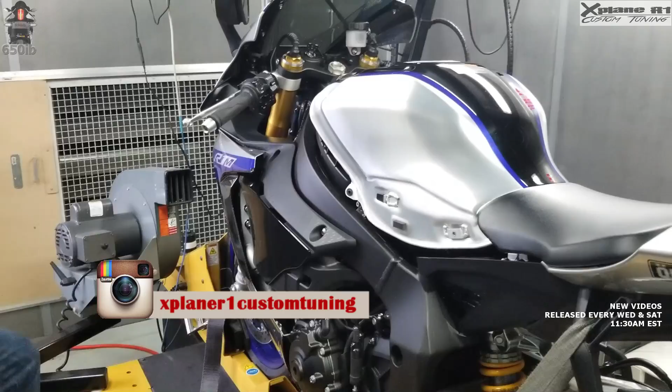Josh is going to be doing some filming for Nick as we go through the process of getting this ECU flash done and the bike made more steady, more reliable, and of course faster. So Nick, these bikes are known for having twitchy throttles and certain other issues from the factory. And as far as I know, you're the man at correcting all that.

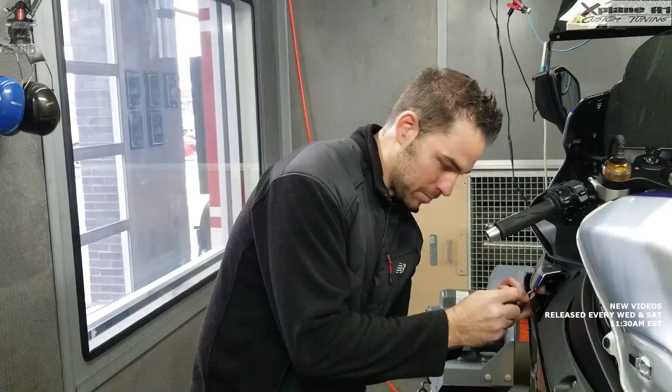Yes. Throttle mapping on these bikes is horrible - it's obviously chip control through the ECU. So I completely redo all the throttle mapping, smooth out ignition timing tables at part throttle so all the transitions are smooth. And then obviously tune the bike for power, correct air fuel ratio, smooth engine braking for you track riders. And then we go from there, see how the bike makes some power.

Sweet, man, super sweet. So your service, people can mail in their ECUs to you, you flash them and mail them back to them basically? Yes. You can go on my website, xplaner1customtuning.com, fill out a form, mail the ECU to me. I typically flash them and get them back to you the day after I get them, so it's fairly quick. You can also come to St. Louis, I dyno tune at QuickTime Motorsports. Shout out to Rudy for always letting me use his dyno whenever I need it. So yeah, you can come out and see me or mail the ECU and I can take care of it either way.

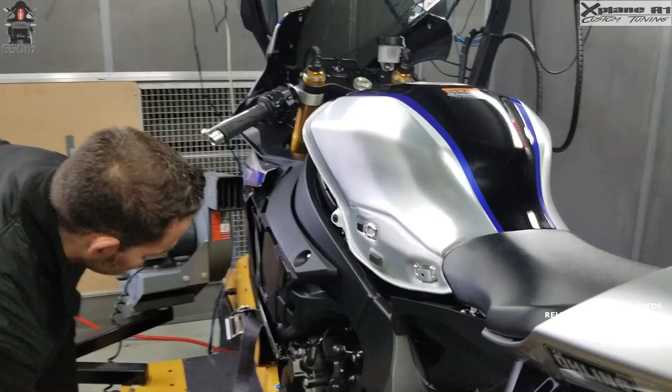Awesome, man, super sweet. Well, I'm pretty excited to see what we're going to be doing here today. We'll give Nick an opportunity to get to that ECU so he can pull it off the bike and get it flashed. We're going to start this off by doing a baseline run on the 2018 R1M just to see what type of power it makes before Nick does his excellent work to it. Then after that, Nick will flash the ECU.

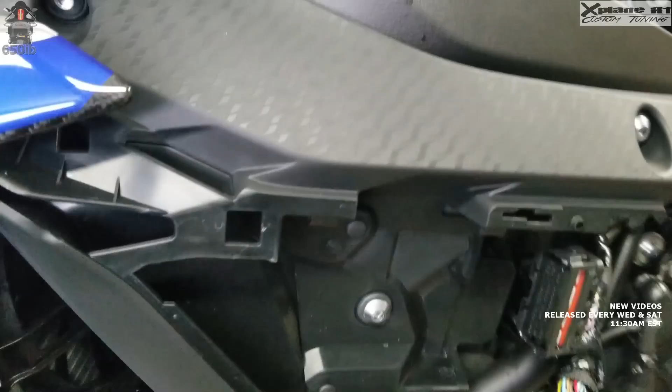So step one, Nick has successfully removed the ECU from the motorcycle, and he has it on his computer system doing his thing with it right now. All going well so far, Nick? Yes, it is going great. Got to disable the front wheel speed sensor so traction control doesn't go out of whack.

If you don't do that, you're gonna end up pulling the bike off the dyno, go for a short ride, clear the code, then come back on the dyno and reflash it again. So instead of doing that, we'll just do it the right way the first time. Makes sense. And it's a little chilly out there to be riding today. It's in the 40s here in St. Louis, for sure.

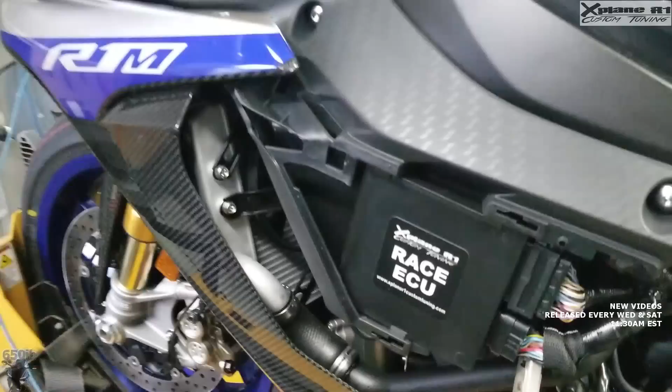All right, Nick. So Nick has flashed the ECU - well, I don't know what the hell he did. The ECU was out of the bike, now it's back in the bike. So Nick will tell us what he did. It's still a 100% bone stock ECU.

The only thing I changed was I cleared the diagnostic code for the front wheel speed sensor. So again, if you don't do that, you try to do a dyno pull, rear wheel spinning faster than the front wheel because obviously the front wheel's not moving, it's gonna throw traction control all out of whack. You got to pull the bike off, take it for a ride to clear everything up. So this is just a quick and easy way to not have that issue.

Now that we have that done, you're gonna jump on the bike and give us a stock dyno pull? Yes, here in a few minutes I'm gonna check to make sure the RPM pickup is reading correctly and everything else is good. And then I'll make some pulls.

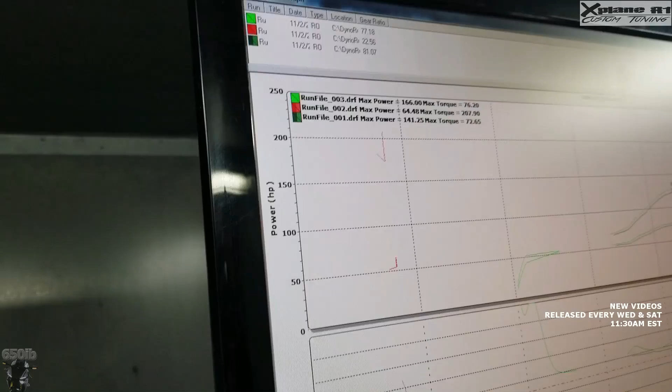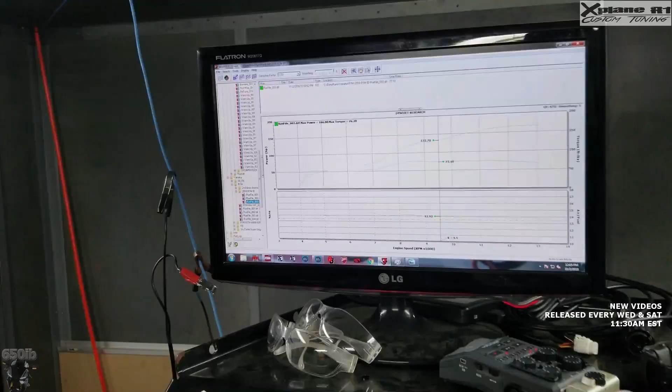So that was the first run, and it made about 166 horsepower, huh Nick? Yep, 166 horsepower and 76 foot-pounds of torque. It's 100% bone stock, with basically just sensors turned off that I need in order to get the bike on a dyno. Okay, so now we'll get this RPM pickup adjusted, hopefully, so it doesn't jump around like that. But the numbers are going to be correct, that won't change. Now we'll do a quick base flash, do some more pulls, and see what happens. I'm excited. 166, not bad for a stock bike.

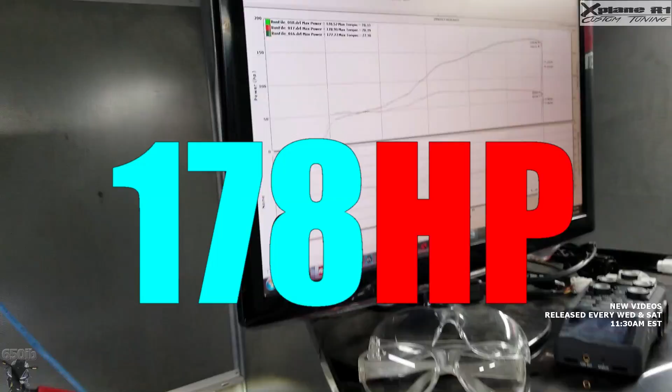Now Zach's going to be very happy when he finds out the throttle issue has been corrected, and this bike now has a smooth and linear throttle. It is very linear now.

I won't show the internet my mapping, because that can be stolen and used by them. But like I said, I'll show you, and then you can relay to him what I did. I think he's gonna like it.

I think he's gonna like the power now too. Oh, I know he's going to like that. And guess what, guys?

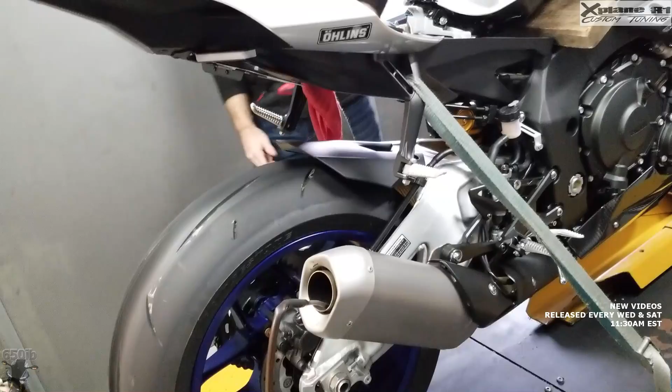We're going to return here in the spring after we get this bike completely modified. After this super silent and horrendous stock exhaust is removed - 50-pound exhaust - and the catalytic converter ball sack underneath the bike after that's gone as well. And then we add our Rotobox boost wheels and all the carbon fiber stuff, full Brembo braking system, and all those goodies to the bike.

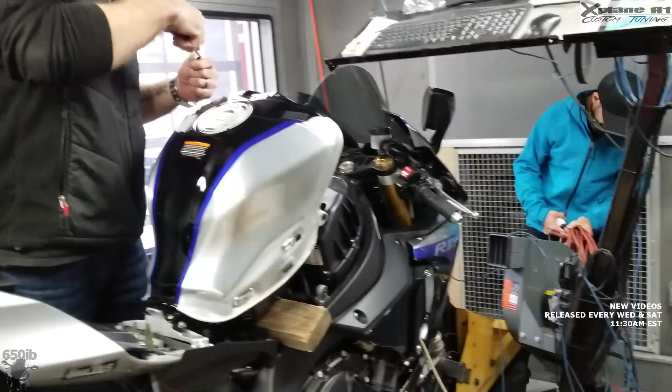We're going to bring it back here to Ducati Detroit. Nick and Josh hopefully will return with him, and he's going to flash it. Okay, you have no choice but to return with us, Josh. I'll be there. Nick will flash the ECU again after it's fully modded, and then it's going to make even more power. My guess...

192 when I'm all done with full exhaust, intake delete, and the wheels. Wow, and that will just be 7 horsepower less than the almighty Ducati V4 Speciale that we put on this dyno here a few months ago. Very important to say, same dyno, and it produced 199 horsepower.

And this bike, when we're all done, it's going to weigh probably less than my V4 Speciale used to weigh, which was 422 pounds. So it's going to be an exciting build series, that's for sure. And we will be back here to see these numbers. But for right now, let's let Nick do his magic.

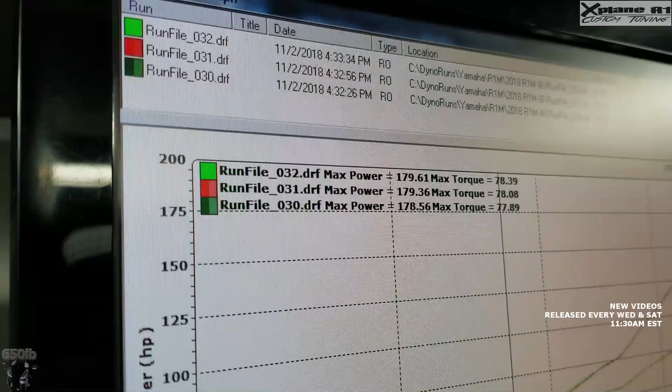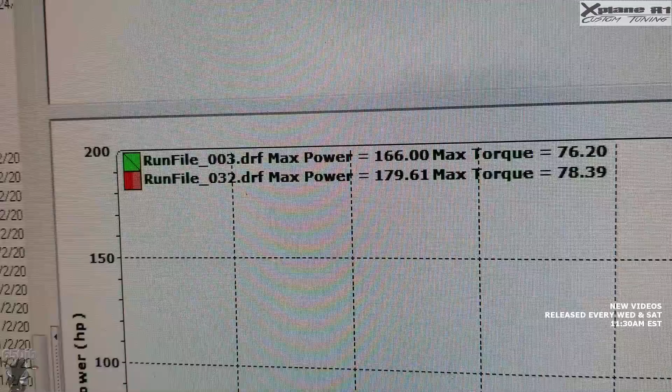So we've been working with Nick all day here, flashing the bike, getting a stock dyno reading that we did before you flashed the motorcycle, and that was at 166 horsepower. Yes, the highest stock number we made was run number 3, 166 horsepower. Flash, bone stock exhaust, and a filter change made 179.61 horsepower and almost 78.4 foot-pounds of torque.

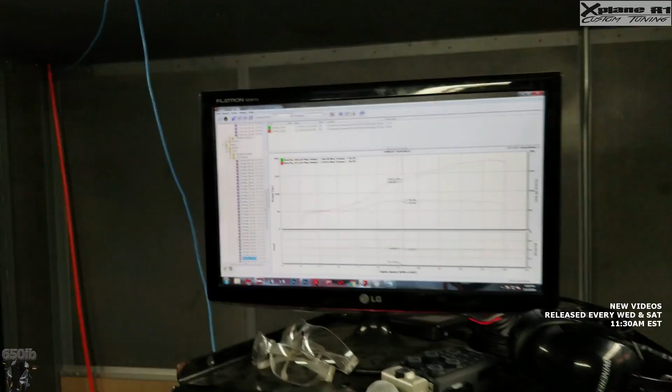So yeah, that's bone stock exhaust, stock header, stock cat, and stock can. He can show you there. Yes, it is all bone stock, nothing done to this bike. Still has the catalytic converter hanging out underneath the motorcycle.

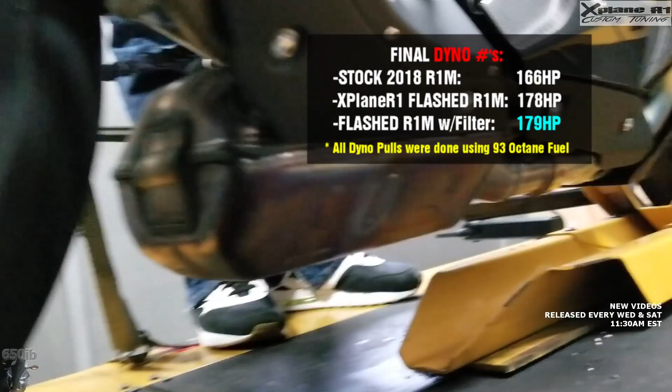So yeah, the bike has less than 700 miles on it right now. All we've done is put the break-in miles on it and change the oil. We've done the first service, brought it up to you to work your magic, and it seems like you've done just that. Yeah, and actually I bet you're able to make a little more power once the motor gets worked in a little bit. I'm sure everything is super tight right now in there.

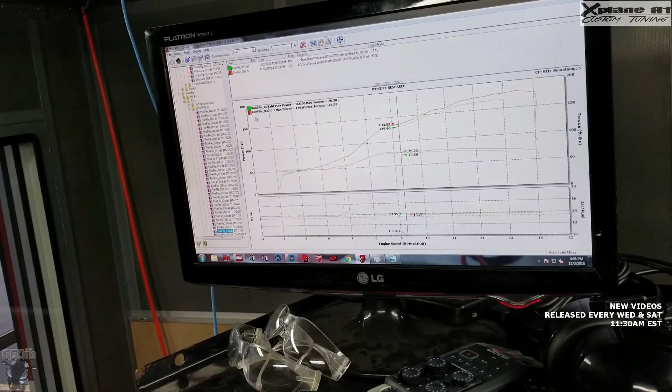I'm gonna go ahead and show a comparison of something here. Let's see here.

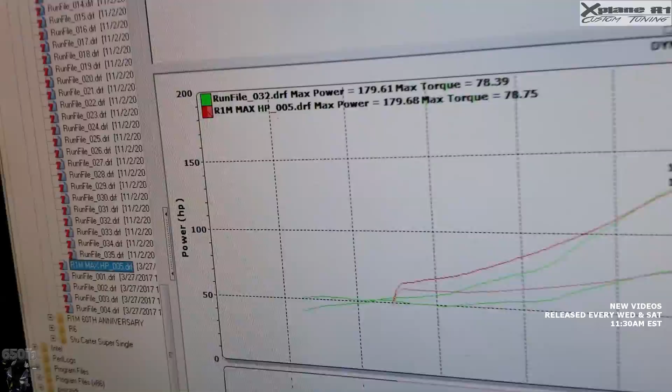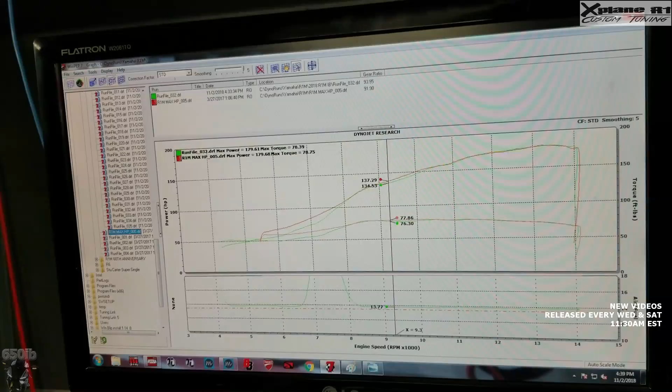So this looks like a run file from my 2015 Yamaha R1M that we put on the dyno here at Ducati Detroit about a year ago when we had our dyno shootout. The bike is fully kitted - it has an ECU flash, an exhaust system, full Brock's Performance Predator exhaust, Sprint air filter, 520 chain and sprockets, and it was running the OEM spec Bridgestone RS10 tires since they were my sponsor that year. That bike, fully kitted, made 179.68 horsepower.

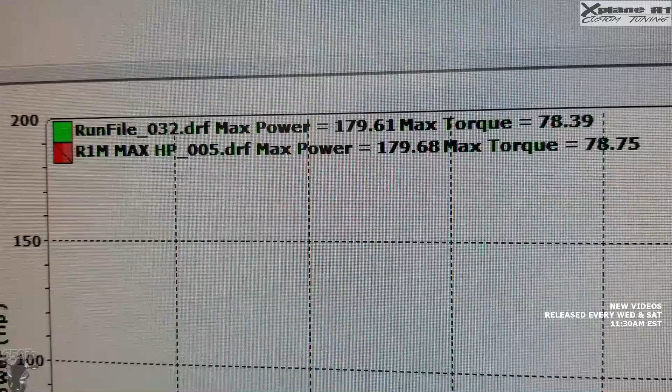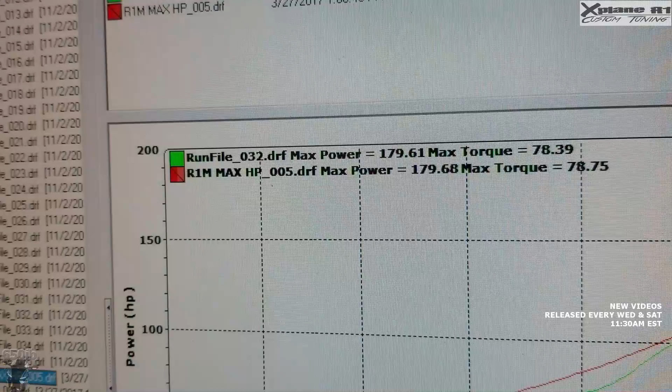I'm definitely looking forward to coming back and bumping up these 15 R1M dyno numbers. We're going to spend the entire winter, a few weeks, getting this bike spec'd out, adding all of our custom parts supplied by Manny at Moto Million. Then we're going to trailer it back, and Nick is going to come back out here and tune it again, flash it again, and see how much power it makes - hopefully 192 or more. I can definitely see it making 190 with the full exhaust and getting rid of that intake flapper.

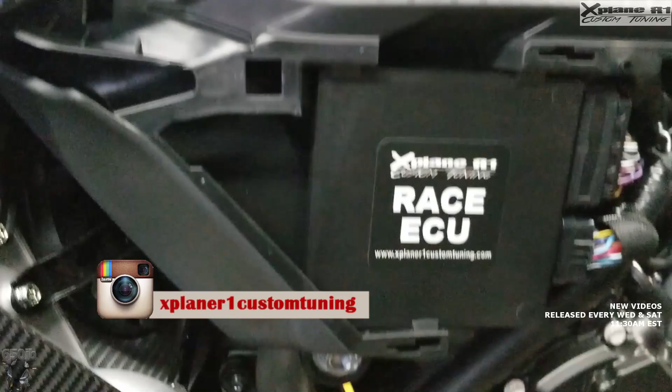So my man Nick Marino from XPlaneR1 Custom Tuning - he's the man to see to get your motorcycle ECU flashed. Nick, what type of bikes do you flash? I can do almost any Suzuki, any Yamaha, any Kawasaki. It really doesn't matter, I have custom built maps for damn near every bike. So if you want some work done, hit me up and let's get these bikes running quick.

So that's a wrap. Nick spent the whole day tuning your 2018 Yamaha R1M, and it is all done. Nick will return here in the spring once this bike is fitted with our custom parts, and he'll tune it again - hopefully you'll make even more power than you did today. You took it from 166 to 179. What do you think is going to happen when you come back? I'm hoping to see 190 with the full exhaust, the intake flapper delete, and your wheels on it - less rotating mass is going to help out. Should be a nice upgrade for sure.